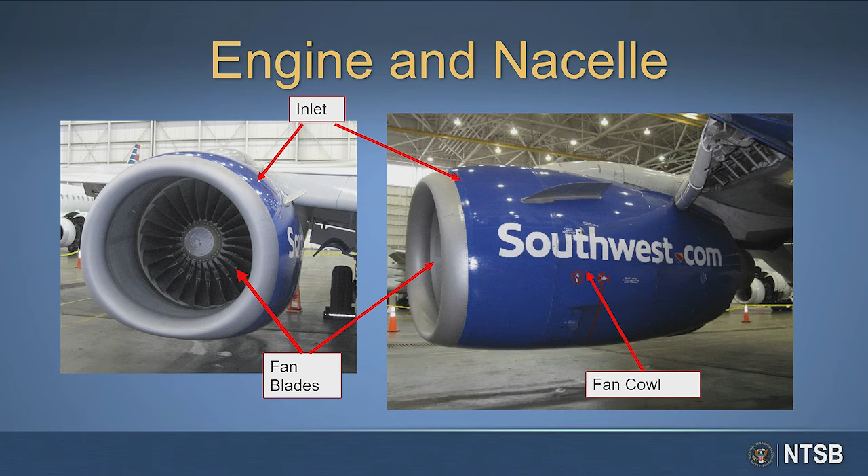Today's hearing will concentrate on the specific events associated with the engine failure and damage to the engine nacelle. The significant components we will discuss today include the fan blades and parts of the structure around the engine called the nacelle, specifically the inlet and the fan cowl.

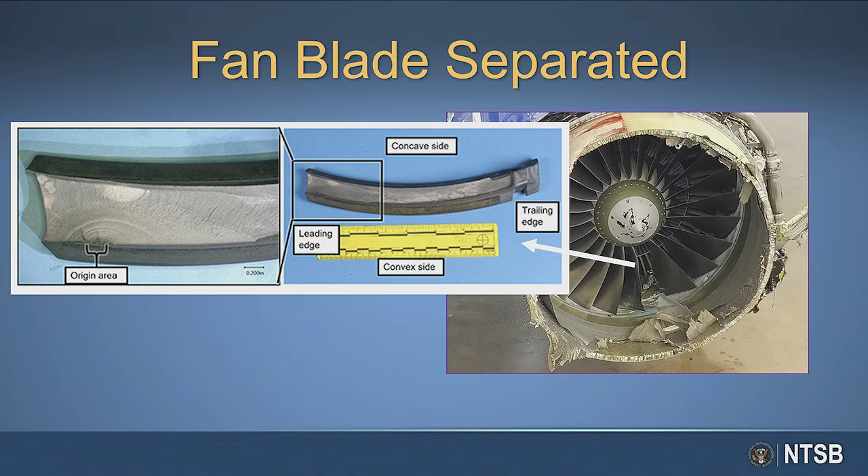The investigation found one of the left engine fan blades separated at the root due to a fatigue crack. At the time of the failure, the blade tip struck the engine fan case, resulting in a large impact load to the engine case and the fragmentation of the blade into several pieces. Portions of the fragmented blade were ejected forward into the inlet. There was significant damage to the inlet and fan cowl that was unexpected for a fan blade out, commonly referred to as an FBO event. We will discuss further details of the damage and the certification history of the engine and nacelle components today.

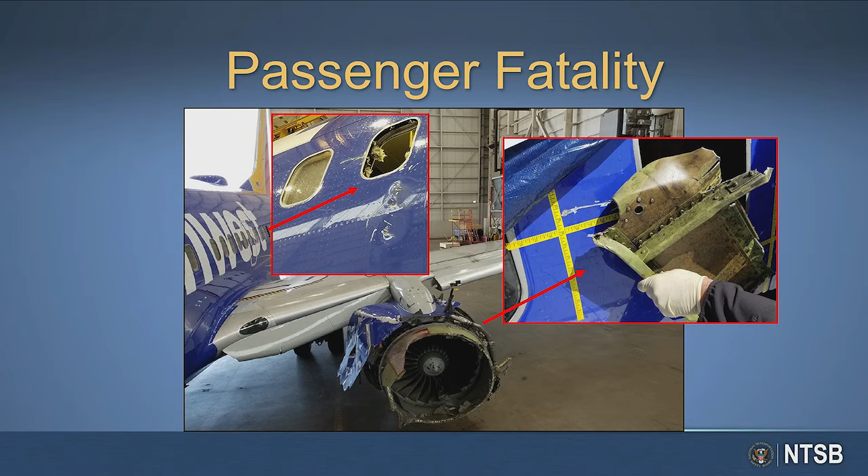A portion of the fan cowl and latch mechanism struck the fuselage near the window adjacent to row 14. The impact resulted in the window departing the airplane, causing rapid depressurization of the cabin and fatal injury to the passenger in seat 14A.

Service bulletins for fan blade inspections were in effect due to a previous CFM56-7B event. However, those were not applicable to this airplane at the time of the Philadelphia event. Airworthiness directives requiring additional inspections were issued following the Southwest 1380 accident. These will be discussed during Panel 1 this morning.

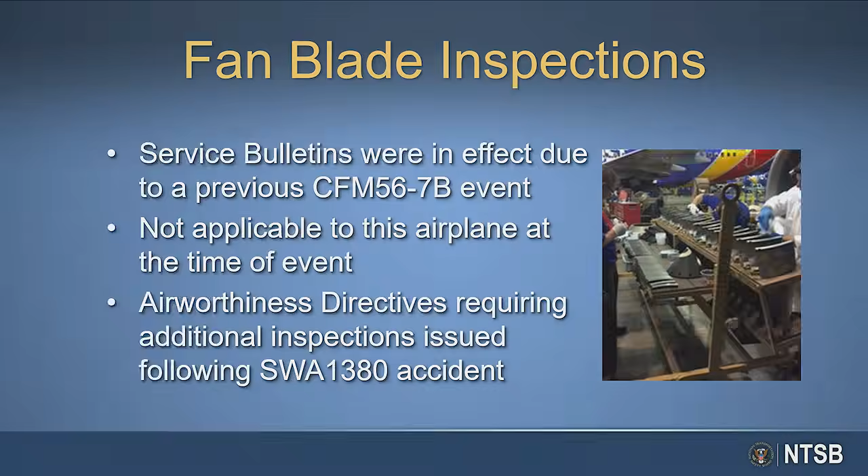Safety issues explored in this hearing will be covered via two panels today. Panel 1 will examine the CFM56-7B engine fan blade design, certification history, the consequences of the fan blade out event, and the inspection intervals and procedures applicable to the fan blades. Panel 2 will examine the Boeing 737 and CFM56-7B inlet and fan cowl design and certification, and the structural capability following a fan blade out event compared to the expected behavior. Exhibits supporting these panels have been entered into the public docket for this investigation, which has been opened at 8 a.m. this morning.

Madam Chairman, would you like for me to now call the first panel of witnesses? Thank you, Mr. English. Please do.

Would panel 1 please take the witness stand? Mr. Seiberg, Mr. Habedank, Mr. Spinney, and Mr. Wibben.

Please remain standing. Please raise your right hand. Do you swear or affirm that the evidence you shall give in the investigation now in hearing shall be the truth, the whole truth, and nothing but the truth? Thank you, gentlemen. Please be seated.

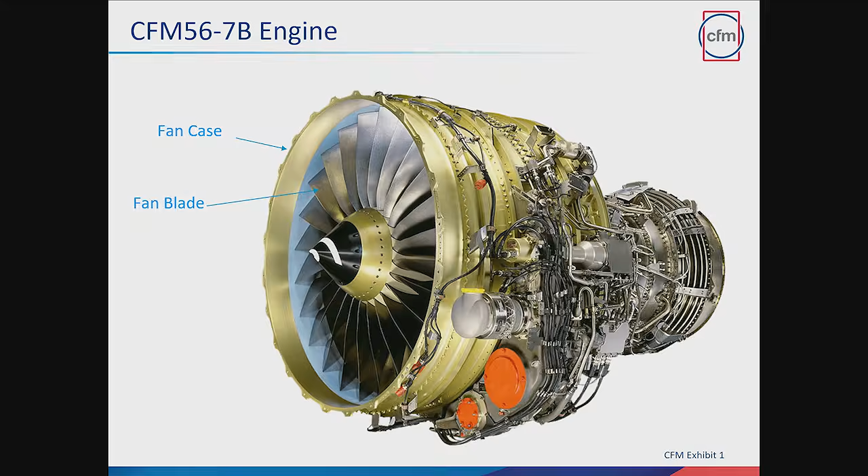Ms. Kemner, if you could go to exhibit slide number 8 now. So this exhibit shows a side-by-side of a narrow chord blade to the wide chord blade. Just to clarify what we mean when we say chord, chord in really simple terms is just the width of the blade. And you can see the difference there between the narrow chord and wide chord.

The big advantage of the wide chord blade is all around thrust and fuel burn. With a bigger blade, wider chord, we're able to pump more air and we're able to pump it more efficiently. And with those two parameters, that's the big advantage. There's also an impact capability with a bigger blade. You're more apt to take impact or maintain a better capability to impact the blade without damage, such as bird strike, hailstone, ice, etc.

And then finally, there's a big maintenance advantage. For the narrow chord blade on the left, there are 38 blades. For the 7B wide chord blade, there are only 24. So a sheer maintainability advantage of roughly 33% fewer blades is significant.

Thank you. Since there are fewer blades and the blades are much heavier, as far as fan blade out containment, are there differences in the approach for design and testing between the narrow chord and the wide chord configuration blades?

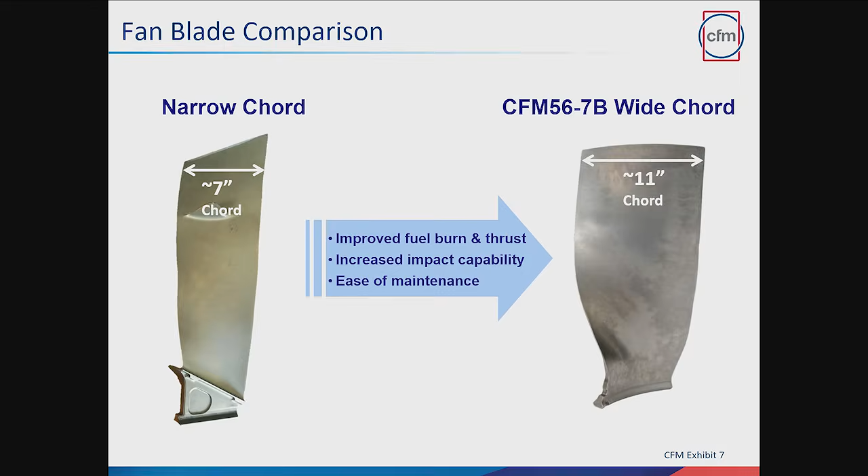I think slides 9 and 10 on that same exhibit help illustrate the point. And again, to frame the reference, I'd ask that Ms. Kemner go to exhibit number 5, which is that cross section we'd shown earlier. One more. There you go. Thank you.

So just to explain what we mean, we keep talking about containment, radial containment. Per the regulation that Mr. Spinney discussed, the requirement is to release one blade at the root or attachment point to the disc. So down at the base of that blade where that magenta color is, is where you would be releasing it. The requirement is, as that blade is released and impacts the fan case and breaks into pieces, none of those pieces can penetrate that fan case. That's what we mean by radial containment.

The other criteria is that due to the vibration of a lost blade, you cannot fail the mounts with those unbalanced loads. The engine cannot catch fire, and the engine configuration has to maintain its ability to safely shut down the engine. So those are the requirements, that puts in perspective what we're trying to do. A lot of focus, though, on the radial containment capability in the fan case.

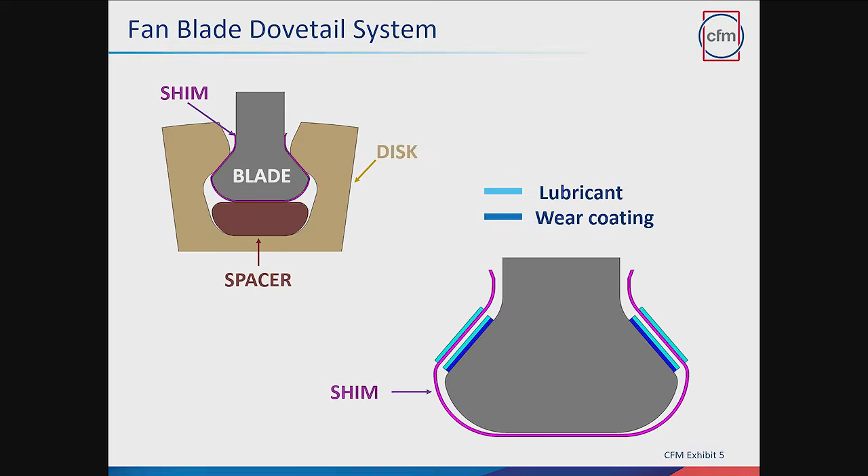So now, if you will, Ms. Kemner, go to exhibit number 9 in the CFM package. Okay, so this chart really explains the collaborative process that is executed through collaboration with the agencies, the airframer, and CFM. It is extremely complex. Put in perspective, there's hundreds of people working on this at any given time across the different companies.

So we kind of broke it into a couple big blocks. On the top, there's the development process. That's where we're developing the design. It's not certification activity, it's all about developing, building confidence, maturing technology, so that when you get to the certification test, you're ready. The expectation is that you pass.

So during this development process, any engine really starts with the key inputs. From the airframer, we get key information, in particular fuel burn, weight of the engine, details on installation, et cetera. We have the Part 33 requirements from the agencies, and then we have our own internal design practices, requirements, et cetera. From all of that collective data, we establish a preliminary engine design.

Once we have that design, we enter this development process where we go into detailed design and analysis to refine the preliminary design. At that point, we would run our first rig test, and I'll talk about what a rig test is here in a second.

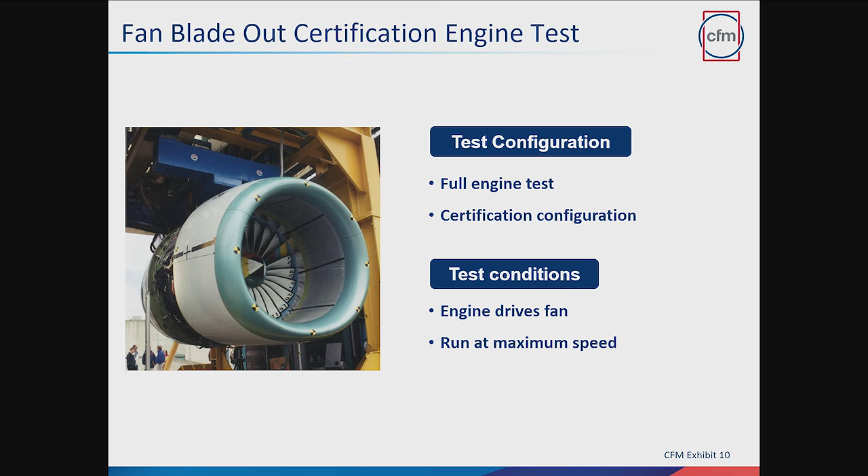So if you could, Ms. Kemner, go back to the process slide on number 8. So again, all that processing there in a development phase was very collaborative with the airframer. There were dozens of meetings. We started those meetings in 1993, so several years before certification, and a lot of data exchange so that both Boeing and CFM were developing their hardware in parallel with the information exchange provided.

So as I said, out of all that rig testing, we established the certification testing. Then we enter the certification process phase. And before we go to test, there's, again, lots of collaboration. On the airframer side, the goal is to get the information, data, loads, high-speed imaging so that they could witness the event after the test. There's a list of requests from the airframer. We get agreement on what that is, and then we define what the configuration is and how exactly we're going to run the test - what speed, how are we going to release the blade, et cetera. All that detail gets put into a formal certification report, and that report is passed to Mr. Spinney and his team at the FAA, and we get a formal approval of that before we can run the test. When we actually execute the test, there is an agency member there to witness it, but there's really nothing to see in the test itself.

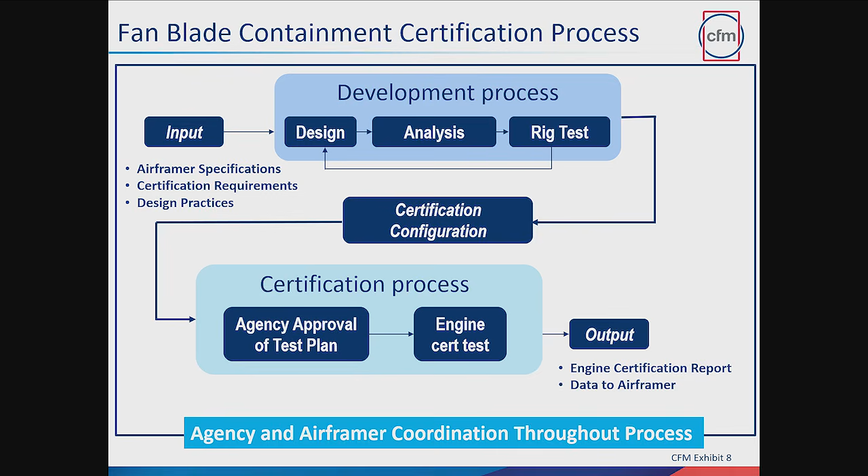This question is for Mr. Seiberg. Before we get into any of the rig test results or certification results, I think this would be a good time to discuss the various parts of the engine fan inlet and fan cowl and how they interface with the engine and airplane. Please discuss who has design and build responsibilities for both the inlet and fan cowl. Exhibit 7 Bravo, pages 2 through 4, explain that. It's a good overview.

The inlet structure, as indicated here, figures 1 and 2 show the inlet on the front end of a Southwest airplane on the engine. Figure 3 points to the constituent parts of the inlet: the outer barrel, the inner barrel denoted in green, and the front end, which we refer to as the lip skin. Figure 4 removes the outer barrel to show visibility to a containment doubler in yellow on the back side of the inner barrel, as well as the aft bulkhead.

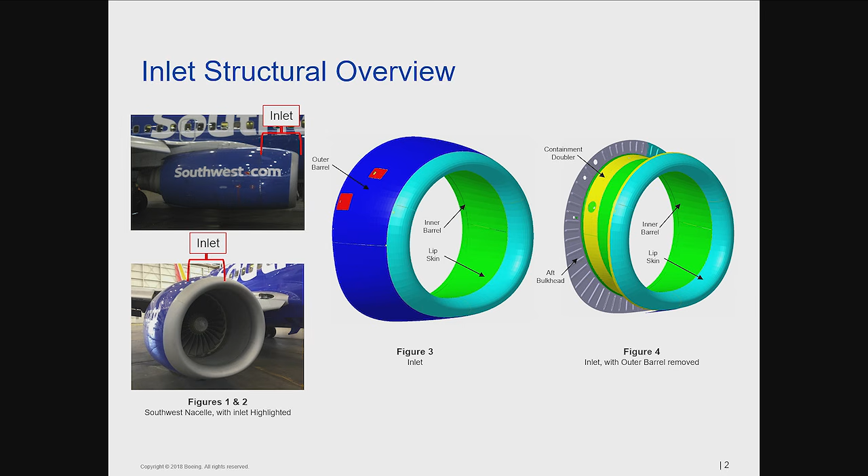The figure on the right is a cross-section cut. In the lower left-hand corner, figure 2 shows the front end of the engine and the upstanding vertical flanges where the engine and the inlet interface, referred to as the A flange. There's a series of bolts around the circumference that directly attach the inlet to the front end of the engine. The constituent materials of the inlet are primarily aluminum, where the forward and aft bulkheads are made out of titanium. The primary purpose of the inlet is to direct smooth, uninterrupted aerodynamic flow into the engine, as well as direct smooth aerodynamic flow external to the nacelle.

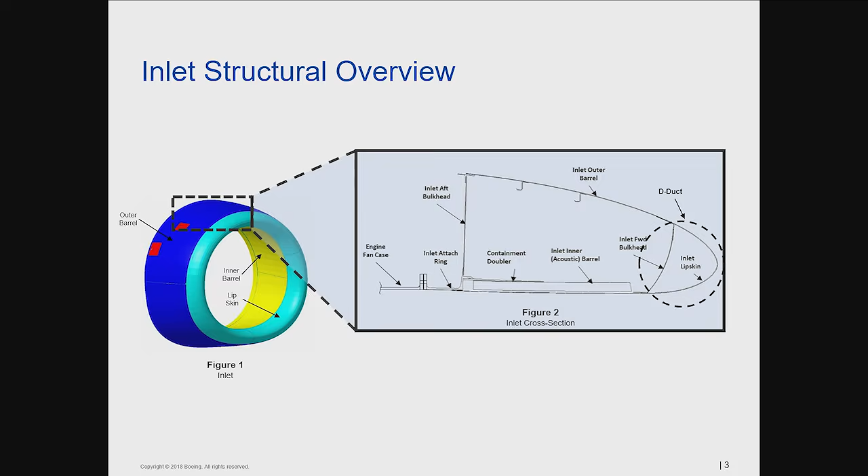This illustrates the fan cowl. In the picture on the left, the fan cowl is shown in the center of the nacelle installation. Relative to the engine, it wraps around the forward, front half of the engine around the fan case described earlier. The primary purposes of the fan cowl are to direct smooth aerodynamic flow around the nacelle, but also to provide maintenance access to the engine by means of hinges at the top and latches at the bottom. Unlatching the cowls at the bottom and holding the hinged open cowls provides maintenance access. The primary materials for the fan cowl are aluminum throughout the skin and stiffeners around the circumference, and the hinges and latches are a combination of titanium and stainless steel.

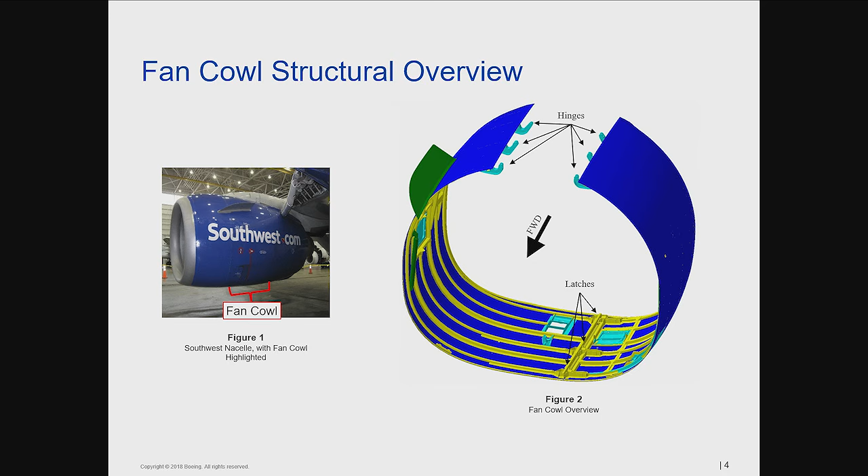These parts, the inlet and the fan cowl, have design requirements that are developed by Boeing, and those were deployed to UTAS, who had the responsibility to take those requirements and develop, design, and build the hardware that complied with them. Great, thank you.

This question is for Mr. Seiberg. As Mr. Habedank had mentioned before, there were numerous rig tests done prior to the actual FBO certification test. One of particular interest is rig test 4, which, if my memory serves correct, is one in which a representative inlet from Boeing was installed. My question is: is it customary for Boeing or any airframer to install airframe hardware on a rig test? And can you discuss some of the results from that rig test and whether there were any corrective actions based on those results? Also, what's the purpose of installing any of your hardware on an engine rig?

Based on best practices that Boeing had developed over working with several engine manufacturers, the interaction between an inlet and a fan case during a fan blade out event is a highly dynamic transient event where there's a lot of loads transmitted across the interface of the A-flange. We had the opportunity to work directly with CFM to support rig test 4 with what we believed at that time to be a production representative inlet, providing the right mass and stiffness on their end, but also allowing Boeing to understand and characterize what happens with the interaction between the inlet and fan case following a fan blade out event. Given this was in a vacuum, this was really just to assess that impact phase where the blade hits the case and then there's a transmission of load, or a ripple effect, across that A1 flange.

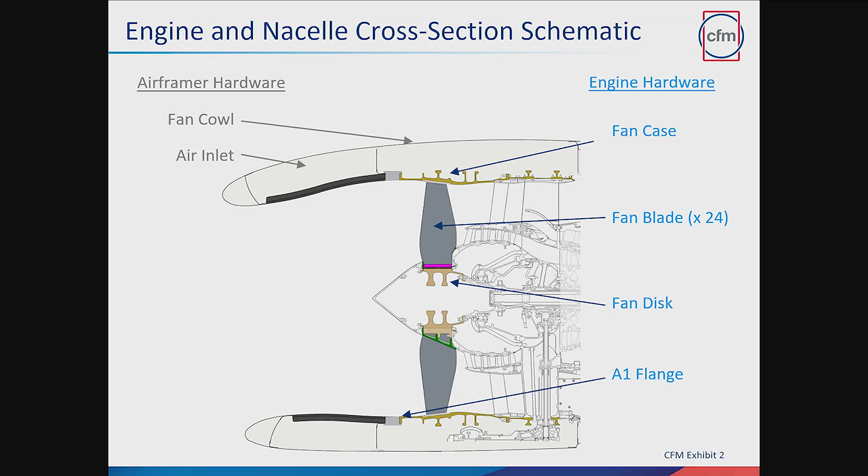Can you please go over in general terms the results of the fan blade out certification test, both the engine damage and the inlet damage as far as you're aware? Mr. Scarfo, could you clarify which certification test this is talking about? The fan blade out certification test, the very first one. Yes, okay.

There was radial containment - the fan case did its job, it maintained the blade radially. We demonstrated the radial containment capability. Shortly after that was demonstrated, there was another event that happened during the test which drove us to a design change on the axial retention feature of the blade. So you asked about damage to the inlet - because there were 5 blades that failed axial retention, those all came forward and did damage the inlet.

So based on this testing, what were the corrective actions or redesigns that CFM initiated to address the release of those additional blades? We did analysis based on the results of the test, and then we also ran several additional rigs to try to validate a new design. That design was included on the second certification test, to demonstrate that feature and validate that it did not fail.

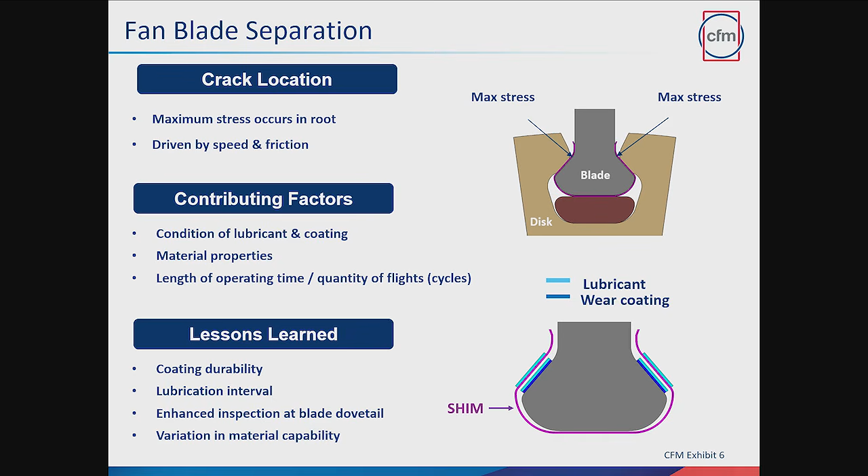You're talking about Philadelphia, correct? Not Pensacola? Yeah, I apologize, yes. That's okay. I just wanted to clarify that those corrective actions happened after Philly. So what I'd like to focus on is those action items. Pensacola was the first fan blade, correct me if I'm wrong, that had a separation or even a crack detected. Then there was a set of corrective actions CFM had taken, and then Philadelphia happened, and as we got a little more smart about the problem, another set of corrective actions happened as well. Yeah, so I kind of just want to go over those various corrective actions. Yeah, okay, thanks for the clarification.

So after the Pensacola event, up to that point, the CFM56-7B had been operating for over 20 years and nearly 300 million flight hours with no fan blade out events. So this was certainly an anomaly. The team responded very quickly. We put all resources on the issue between GE and Safran. We worked an investigation that was broken up into three elements.

The first of the elements is around investigation and discovery, looking at the metallography, et cetera. Then moving into development of the inspections we talked about, and finally the implementation of those inspections. We may get into those details, but because of time I'm not going to go through those right now, with a focus on the service bulletins. So all of that work was being done following the Pensacola event.

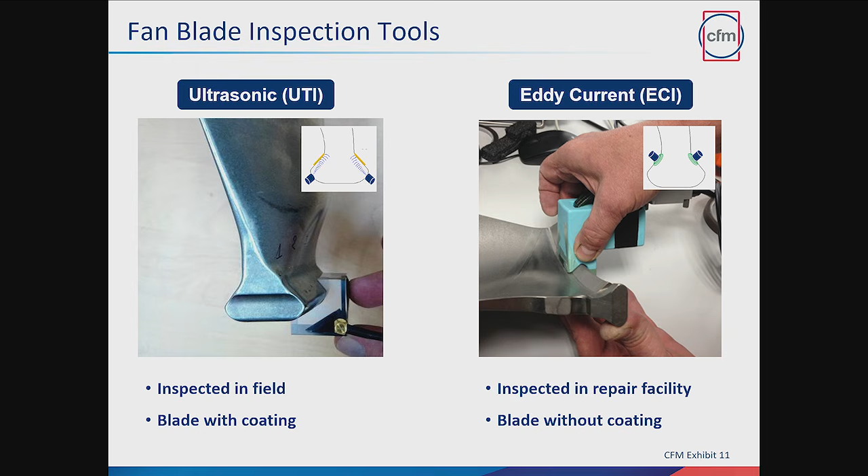Thank you. I've got one more question. I didn't want to have Mr. Wyben feel left out. I've got one question for you.

Why were the fan blades on the Philadelphia event not inspected at the time of the event?

As Mr. English indicated at the beginning of the hearing today, the fan blades in the event engine in Philadelphia were not subject to either the service bulletins that CFM had issued prior to the event, subsequent to Pensacola, nor were they in the population of high-time fan blades that Mr. Habedank alluded to that we inspected in the months after the Pensacola event. So we really had no basis to prioritize these fan blades versus any other blades in our fleet.

In December of 2017, we made the decision to incorporate the ultrasonic inspection procedure into our regular maintenance program and look at every blade in our fleet every 3,000 cycles. In the time period between December of 2017 and the event in April of 2018, this engine was not inspected. It did not have the blade lube come due.

Thank you. Mr. Billings? All right, thanks, Pierre. Does the tech panel have any other questions to go around? Dr. Fox, do you have any follow-up? I think we're out of time. If you have something, we can get something in. Okay, I guess I'll just ask one quick question for Mr. Habedank.

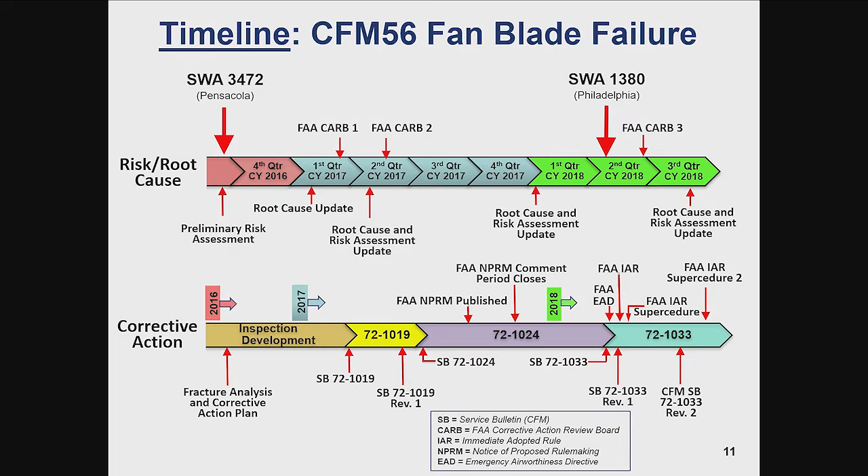We have another tool called an immediate adopted rule, where it's not quite as high as an emergency AD, but it becomes effective shortly after we issue it, and we seek public comments after the effective date of the AD.

In the final, lower risk categories, while they're above the threshold, we've determined an unsafe condition, but the timeline in order to correct that unsafe condition is longer. Then we issue what's called a notice of proposed rulemaking, and follow that by seeking public comment on the rule, then publish a final rule after we evaluate the comments received from the public.

And the fourth, obviously, if we determine that there's no unsafe condition, then we would take no airworthiness directive action.

And so at the time after Pensacola, was Pensacola the very first fan blade out of this particular blade? That's correct. Our initial assessment for Pensacola was the first fan blade out in 300 million flight hours of the engine. It was a very unexpected event, and the consequences were a slow depressurization. So we determined early that we would require some corrective action and that it was an unsafe condition. But we also determined that we had some time, and we were taking the route of a notice of proposed rulemaking.

Okay, thank you. And just one final question. That rig test 4 that you described, was that specifically to demonstrate the retention of the blade after that first test, which showed a blade out?

Well, I might be confusing the different rigs in certification, but let me try to clarify. On rig test 4, as described, we liberated the tip like we always do, and that piece penetrated the inlet. We had the Boeing inlet on that test.

Then we ran engine 2 build 2, which was our first certification test. In that test, we demonstrated the radial containment capability, but then shortly after the event, seconds later, we had 5 blades released. That's what caused the damage.

When we went back for the second certification test, the purpose of that test was to demonstrate two things: one, that the design change was adequate, that we didn't release the blades again, and two, that the containment capability demonstration was not affected. So we still had to demonstrate the radial containment capability.

So it wasn't meant to demonstrate the inlet and fan cowl damage? There was no specific reason to have put an inlet on the second certification test. Okay, thank you, that's all I have.

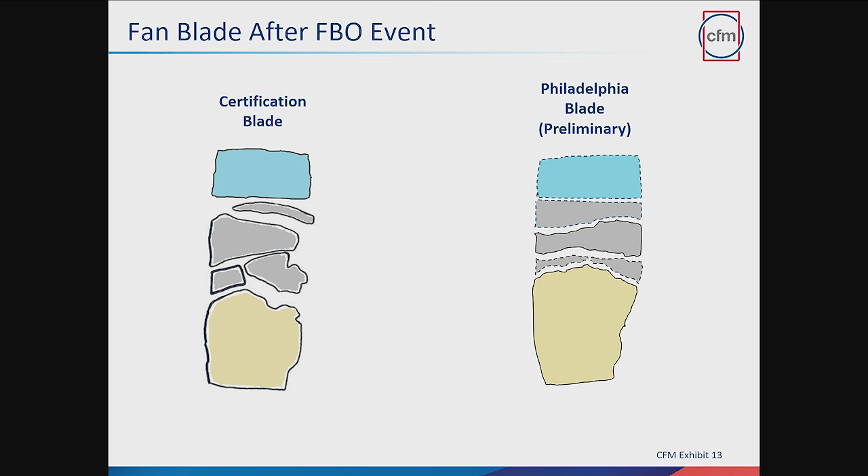This is for Mr. Seiberg. This is in relationship to rig test 4. I think we kind of glossed over it a little bit, the importance of rig test 4 from the inlet's perspective. That was the first, and if I recall, the only time that a production-representative inlet was installed on a rig prior to the certification test. Based on the damage that you saw, what were the corrective actions or redesigns that Boeing undertook to address the damage that was observed in rig test 4?

Following rig test 4, we worked directly with CFM to fully understand the fan blade fragment definition that went through the inner and outer barrel of the inlet. Upon definition from CFM of the exact parameters of energies and trajectories, Boeing then put a conservative estimate on that to develop a requirement, which was then deployed to UTAS, who was responsible for the design and development of the inlet, with instructions in those requirements to develop a containment doubler to be able to contain the fragment as defined from rig test 4, with a conservative level estimate above that.

So just for clarification, rig test 4 had a representative inlet without a doubler or containment shield, and for the certification test, that's when you had a representative production inlet with a containment shield. That is correct, and then through the post-test investigation of the data from the certification test, we were able to follow the fragmentation going into the inlet and get observations that the containment doubler was not penetrated during the certification test. Excellent, thank you. That's all I have.

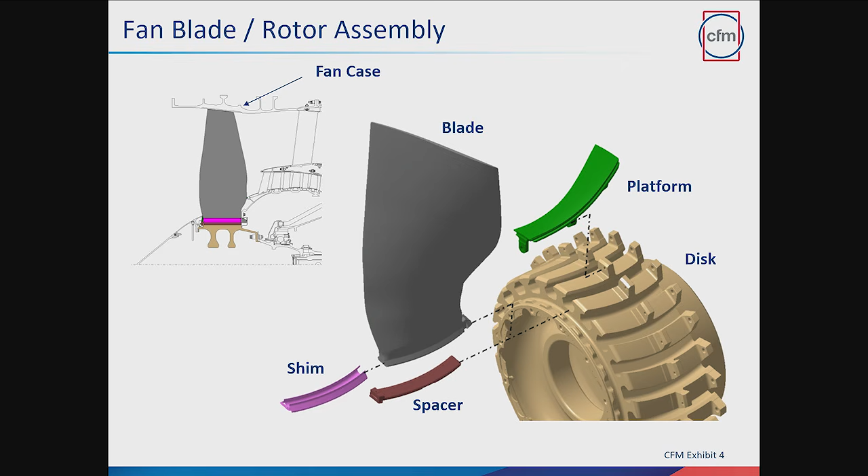That feature's in there so that with normal operation, you've got a heavy aero load with all that air pumping. Without some kind of axial feature, it would just shove the blades forward. Okay, great, thank you, sir.

If we can go back to the other photos, let's just talk through Philadelphia a bit. So we know for Philadelphia, just the one blade failed at the root. The axial retention was not an issue.

That we see from the Philadelphia event. Are you directing that to me? Yes, to Mr. Habedank. Okay, so I want to make sure I understand exactly what you're looking for. Just describe what we're seeing here with these fragments.

So these are similar to what we think we see in the Philadelphia event, and you mentioned earlier that you think that's similar to what you saw in certification, correct? Yes. With this in-process work being done, let's focus on the tip panel because that's very consistent—it's the highest energy piece.

It doesn't just come straight out forward because it's got rotational energy. It's sliding almost like a marble around the inside of the nacelle itself. As it's doing that, it's also coming forward. So there's a helix angle associated with the trajectory, which is where a lot of the focus of the investigation is. These are the witness marks on the case that define what that spiral or helix angle is for each of the particles.

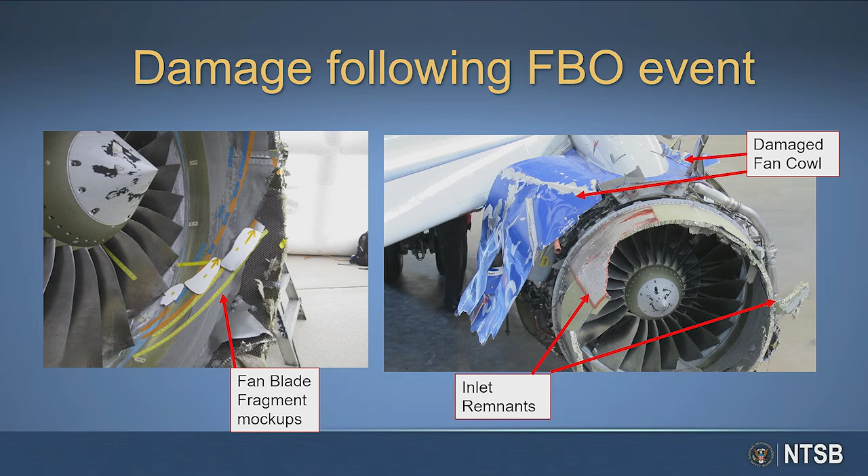And just to go back a little bit, the trajectories that are in the installation manual are based on the final certification test in the prior certification test. So they all came after the rig test that you were talking about. After that Cert 2/2, correct? Yes. Right. Okay, thank you.

That's the end of my questions. Matt, Dr. Fox has some questions.

Thank you. I guess, Mr. Habedank, you had mentioned earlier during prior line of questioning about not taking credit for the shot peen surface condition, and also reference standard material properties. Could you describe a little bit how you determine the standard material properties with regard to fatigue life?

Yes, for the original design, for the original life of the initial design, we used standard titanium material properties for the blade and made assessments with that. Part of our root cause investigation, we wanted to get a better material curve, so we actually took multiple blades and took specimens out of specifically forged blade forgings for 7B blades, and re-looked at the material properties to get a better definition.

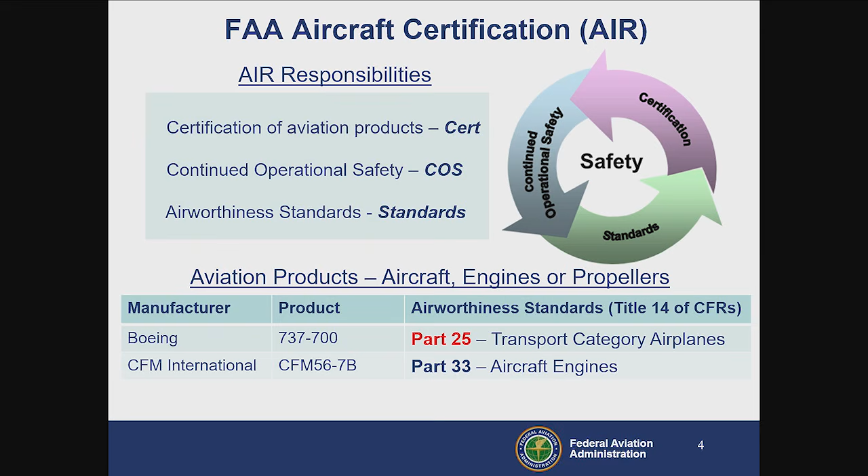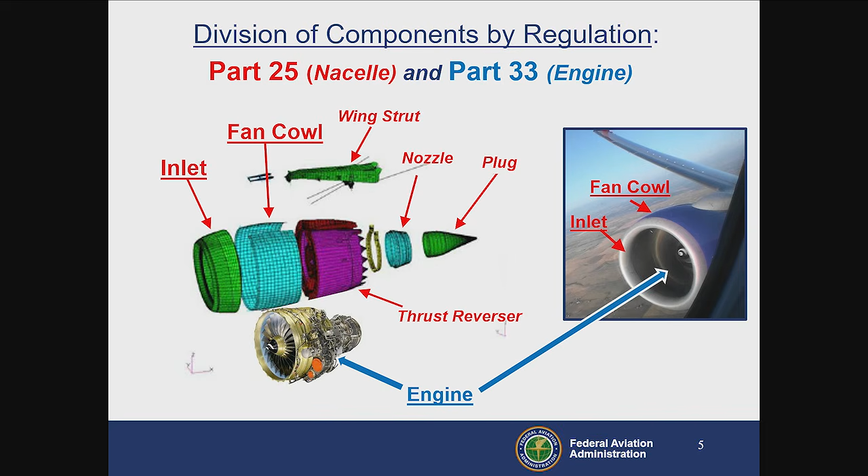If we move to Slide 5, please. The Part 33 engine standards apply to the engine. The Part 25 standards apply to the engine installation, including the items highlighted here in red, the inlet, the fan cowl, the strut, nozzle, and plug and thrust reverser. All right, great. Thank you, Mr. Wickland. Could you please let us know what the acceptable means of compliance for the design and certification of the inlet and the fan cowl are?

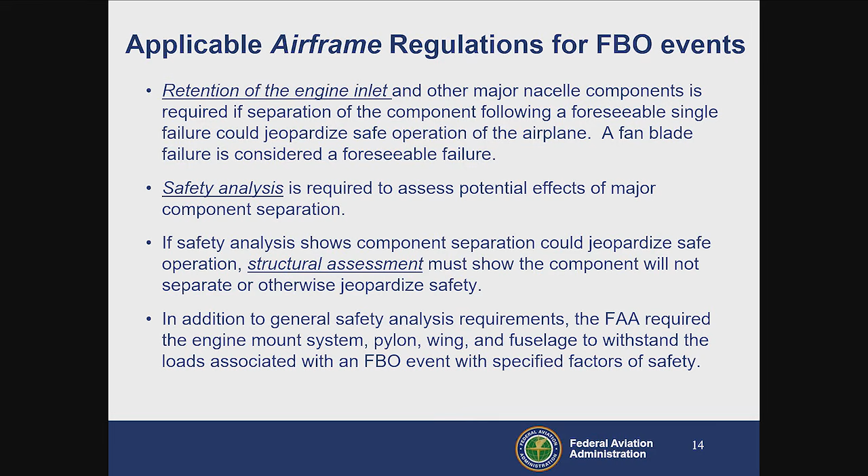Certainly. If we refer to Slide 14, please, of Exhibit 7D. Basically the requirements for the engine inlet and the other major nacelle components is for the airplane manufacturer to show that they are safe in the event of a fan blade out event. In this case, the airplane manufacturer would show that a fan blade out event would be a foreseeable single failure, and that the result couldn't jeopardize the safe operation of the airplane. In the case of the engine inlet being the mass that it is, generally that requires that they retain the inlet in a fan blade out event.

Back to when I was getting at with the acceptable means of compliance, more straightforward, is it required that the inlet or the fan cowl actually go through a structural test as an assembly, as an entire unit, or can it be certified through analysis alone? It could, either way would be fine. You could either test it or conduct analysis based on test.

Great, thank you. This would be to follow up from a question from this morning that was already addressed, but I'll have this in two parts, and Mr. Wicklund or Mr. Seiberg, or either one of you could answer it. One will answer the other. Is there a requirement then for a production inlet during the certification tests? And then what would follow with that question is, let's just go with that for right now then, thank you.

Oh, so there is not a requirement for production inlet. As was discussed earlier, they could use representative components to simulate the mass stiffness of the inlet during a Part 33 test. I was asking just then, so for clarification, because we talked about rig tests and we talked about actual certification tests. So even for those engine Part 33 certification tests, it is not required by the FAA, or well we're not going to speak for DGAC here, EASA, but by the FAA then to have production hardware for the inlet on their test. That is correct.

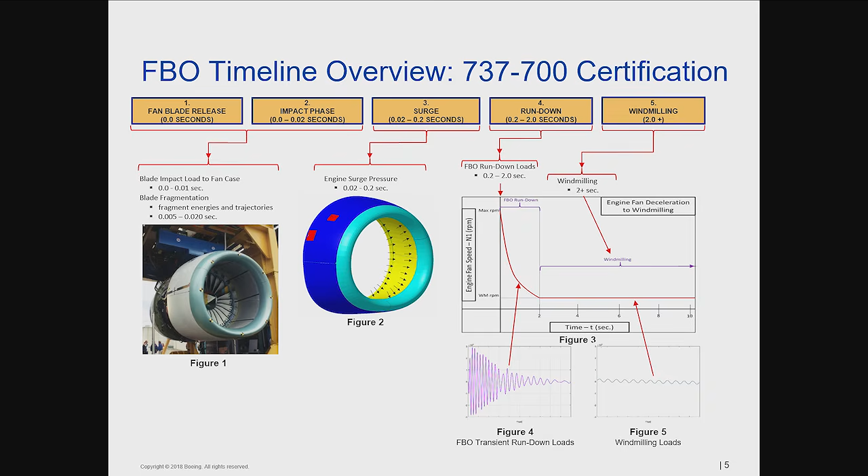Thank you. During our investigation, we referred to that ripple effect that you just spoke of as the displacement wave.

If we go back to the rig tests or the certification tests, did that displacement wave cause damage to the inlet or inlet structure? Through the tests we supported, at that time frame our analytical capabilities of understanding the displacement wave were not understood from the analysis side. That's one of the primary reasons we put inlets on both rig tests and certification tests, even though they're not required, to understand those first few milliseconds and how the interaction between the engine and the inlet affects it. From the tests we supported, there was damage to the area around the aft bulkhead as a result of that ripple effect or displacement wave.

And that damage was the same as you've seen in Pensacola and Philadelphia? In those areas, yes, correct. So it was a direct correlation between what was happening in test and what happened in the events. That is correct. Okay, thank you.

You gave these timelines up here on top. Could you give us an estimate of how long it was for our event from the fan blade out to cabin depressurization? The NTSB, we've supported their timeline estimate with the review of the flight data recorder information, and it's the NTSB's estimate as well as Boeing's that the fan cowl fragment that hit the airplane hit it within 3 seconds from blade release. So within 3 seconds, we're out to the rundown phase then, that far out in the timeline that was up earlier. Just about, yes.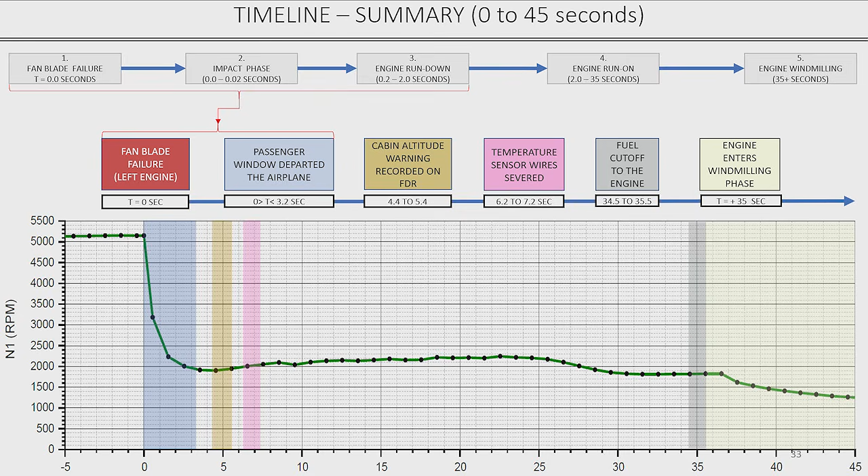All right, so that's during the run-on. We talked about this at length in the morning, but Mr. Manabe, could you compare and contrast? I understand there were more damages than just the doubler, and there was more to the redesign when we went from the initial inlet in the rig test to the 2-2 test. Could you go through all the changes that were made as a result of the test?

Sure. Let me utilize the UTAS exhibit. If we can move to slide number 4, please. UTAS, yes, 7C.

So let me walk through the evolution of the inlet. There were two different production configuration inlets that were used between the Rig 4 test as well as the engine cert 2-2 test. This depicts the initial inlet design. This particular configuration did not include a containment doubler. The original requirements that we had received through the SCD from Boeing didn't have any blade fragment containment requirements, so we developed this without the containment doubler shown here.

As was discussed this morning, originally it was believed that the containment of the blades would be handled by the engine fan case. That's what's shown here, on the lower right, with that 15 degrees. As a result of the fan blade out test during the Rig 4, we saw that fragments were moving forward into the inlet. At that time, it was determined that additional containment provisions would be required within the inlet. At that time, then, the SCD was updated by Boeing.

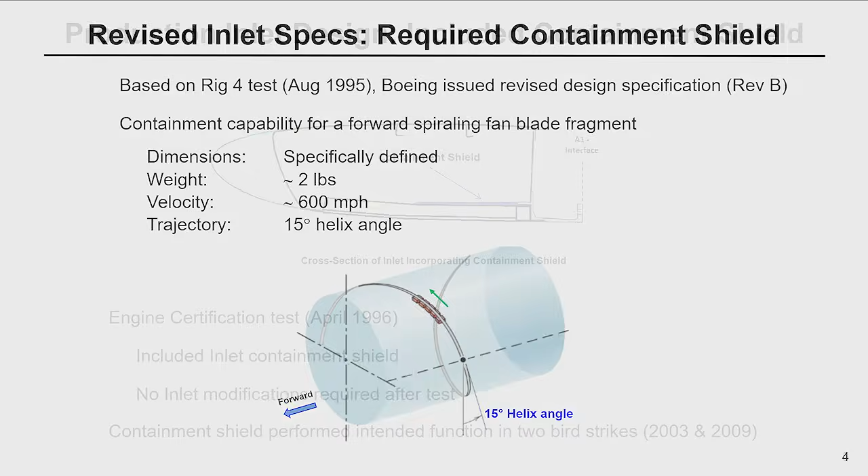So this is the second configuration of the inlet. This is the one that includes the containment shield shown here in blue. And this is the version that we went into the certification 2-2 test with. During that test, it was determined that the containment shield as well as the inlet performed its intended function, and that at that point in time, there was no further redesign required.

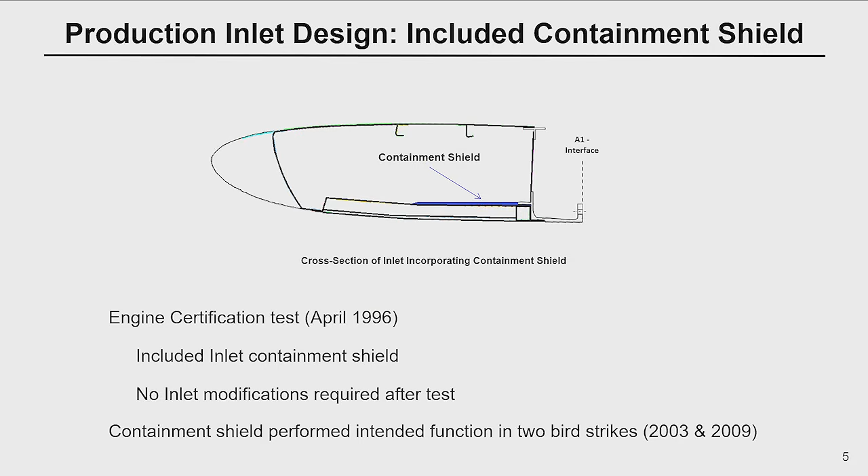Mr. Manabe, if we go back to the first slide. One more. Yeah, this one here. There was more damage, I believe, as a result of one of the tests that led to the other redesigns that are shown here in the attach flange and at the honeycomb interface and the inner barrel?

Yeah, so let me explain. So this is the initial configuration that was used during the Rig 4 test. There was a blade fragment that came forward, and it damaged the inner barrel and then also damaged the outer barrel. There was some additional damage in the inner barrel right around where it says the attach ring, the aft bulkhead interface. There was some additional damage in the inner barrel at that location.

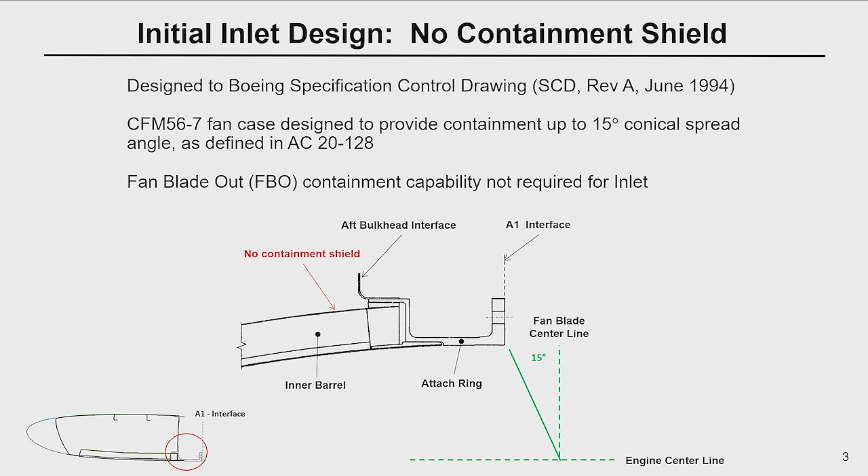If we move over to slide number 6, please. This actually gives a good contrast with the two different configurations. So on the left is the initial design. On the right is the final production configuration. During the Rig 4 test with the initial design, on the aft bulkhead interface, we saw some damage there on the inner barrel. We then extended the length of the attach ring forward so it would cover that portion of the inner barrel. So that was taken out of the picture for the next configuration.

Then we also added the containment shield, and then we added the length to the attach ring.

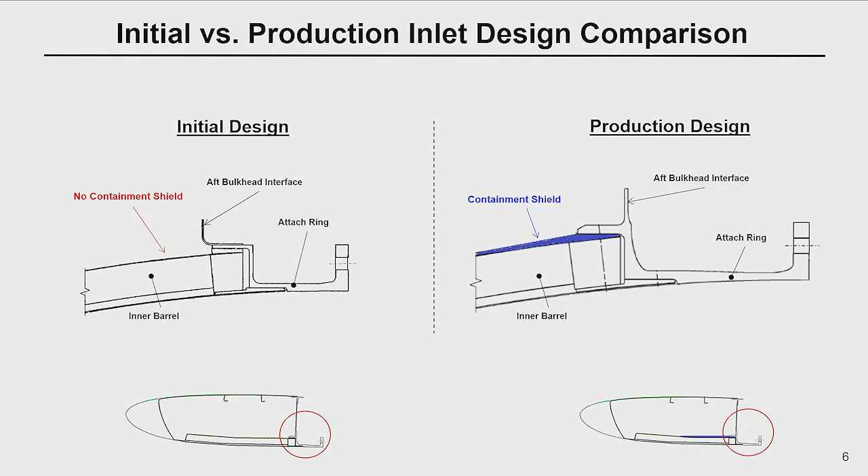Great, thank you. I've now gotten into the point where we have the overlap with the Boeing company and UTAS. So whether Mr. Manabe or Mr. Seiberg would like, could you take us through, much like this morning, just briefly the relationship between the two of you and the manufacturing, design, and analysis of the inlet and fan cowl?

Yes, Ms. Kemner, could you please bring up slide 6 from the Exhibit 7B?

This provides a high-level outline of how the tri-party collaboration took place over the preliminary design, detailed design, and certification. Within the airplane program, the airframer stipulates the requirements for the engine, usually in terms of thrust and fuel burn. For the inlet, it's usually in terms of loads and aerodynamic configuration. Once the parties have their sets of requirements, Boeing typically collaborates with all the parties to make sure they understand what the requirements are, how they will comply with those requirements, then work through the actual demonstration of developing the parts that will comply, and finally supporting the validation and ensuring all requirements are complied with.

Regarding a fan blade out event, the preliminary information that comes from CFM is what we refer to as the forcing function - the internal engine loads that are developed in those first 2 seconds. That helps Boeing derive loads for the entire propulsion structure, including the wing attachments, where we include things in our model that aren't in the ground test, which are the air loads. We also look at different release angles that are not done in the test. From there, we get a preliminary design.

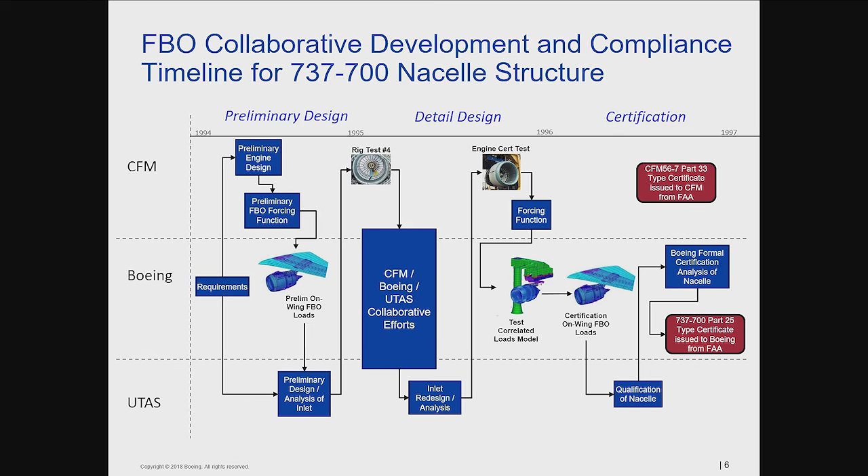Mr. Syberg, we spoke earlier about the different phases of loading throughout the fan blade out event.

Understanding that everything is still preliminary at this point with everything we're working on, how has the analysis progressed in both Philadelphia and Pensacola to date, and where are you with the analysis?

So the analysis, which has been going on now for a lot of time with a lot of resources, and focusing on the timeline we discussed earlier, where it showed that the parts departed the airplane within 3 seconds, that brings into light that the impact phase and the rundown phase are the primary areas we need to look at.

Within the impact phase, we have evidence of scrape marks within the fan case of fan blade fragments exiting the engine. But on the inlet side, we were only able to recover portions of the inlet that remained after landing. So there's a lot of detailed metallurgical work going on the fracture surfaces of that hardware that's been obtained. There's also detailed visual examinations of the hardware to understand where all the failure locations are.

In addition to that, we have the timeline that we're working with. So where the point of the investigation is now is we're doing detailed analytical simulations using our latest model capabilities to try to be able to predict the same failure modes and locations that the observations have shown us, and that those failures occur within the timeline that we've estimated with the investigation.

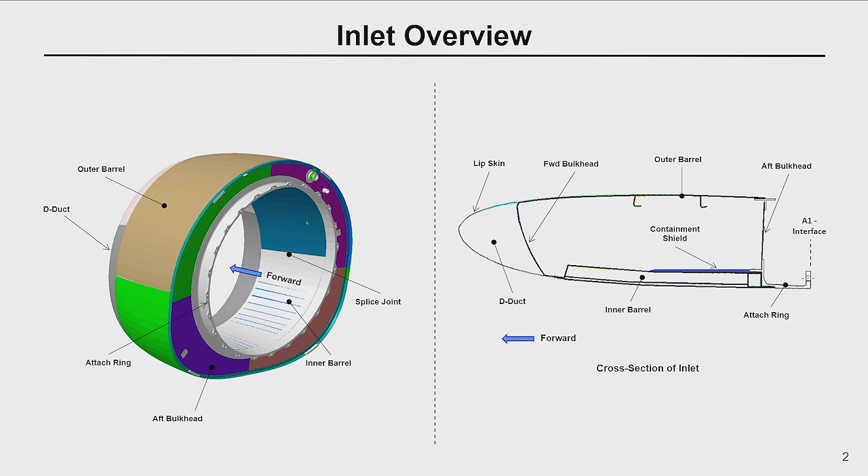That fragment, the 2-pound segment, was the tip fragment that went through and was documented in the regulatory certification documents. We put the weight, trajectory, energy, and direction, which was the 15-degree helix angle, as Mr. Spinney described this morning in the installation manual.

Great, thank you. Mr. Habedank, again coming back to this morning, we were talking about blade fragments, and I believe we have 10 tests. What are we, 8 or 10? I'm trying to remember - 8 rig and 2 cert? Yes, total of 8 rig tests and 2 certification tests.

Amongst all of those tests in their entirety, were the trajectories, masses, velocities, directional movement, and behavior the same amongst all 10? It was similar. The tip fragment was probably the most consistent piece, broke off in a similar manner, and always went forward in all 10 tests. So that was probably the most consistent piece. The midspan fragments, as we've talked about a couple times today, sometimes go forward, sometimes aft.

Torben, I, and others have said there were multiple collaboration meetings between CFM and the agencies and the airframer as we were going through the rig testing, and primarily right before certification we reviewed all of the results collectively, and the midspan fragments were a topic of discussion.

Great, thank you. Mr. Manabe, you have all the hardware for both Pensacola and Philadelphia located at your facility. Can you compare and contrast the similarities and differences between those two inlets and fan cowl structures?

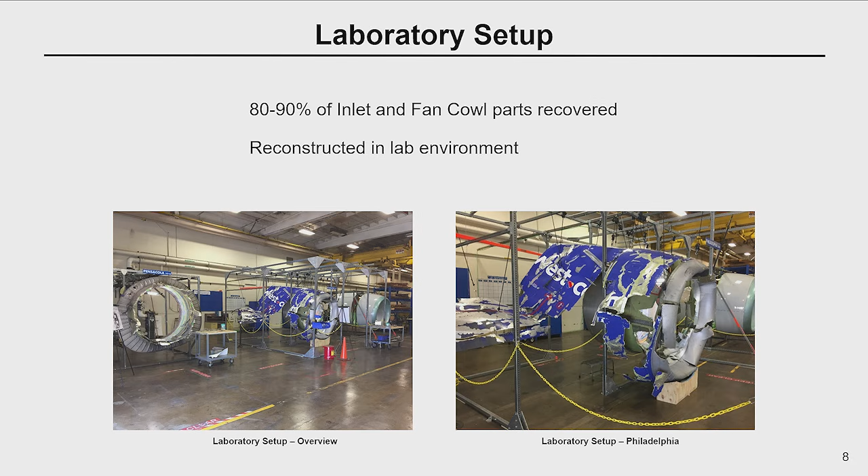This gives a little bit of comparison between the Pensacola and the Philadelphia event. On the left is the Pensacola event, the right is the Philadelphia event. The fan cowls in the Pensacola event did stay attached, as we had talked about. We believe one of the reasons for that was that the aft bulkhead on the inlet, as you can see in the upper left - the silver bulkhead - stayed in place. The fan cowl, which is the blue portion there in the upper left, stayed tightly wrapped around that aft bulkhead. So we believe that might have been a contributing factor to why the fan cowl stayed attached in Pensacola and not on Philadelphia.

If you move to the picture on the right, that's the Philadelphia unit. We did see the departure of major portions of the inlet as well as the aft bulkhead. We believe that may have contributed to some of the scooping underneath the fan cowl.

What you'll also notice in the two pictures above, in the dark greenish color, that's the containment shield. In both events, the inlet departed - portions of the inlet departed just forward of that containment shield. So that green cylinder that you see in both pictures represents the containment shield. In both cases, the inner barrel of the inlet departed at that location.

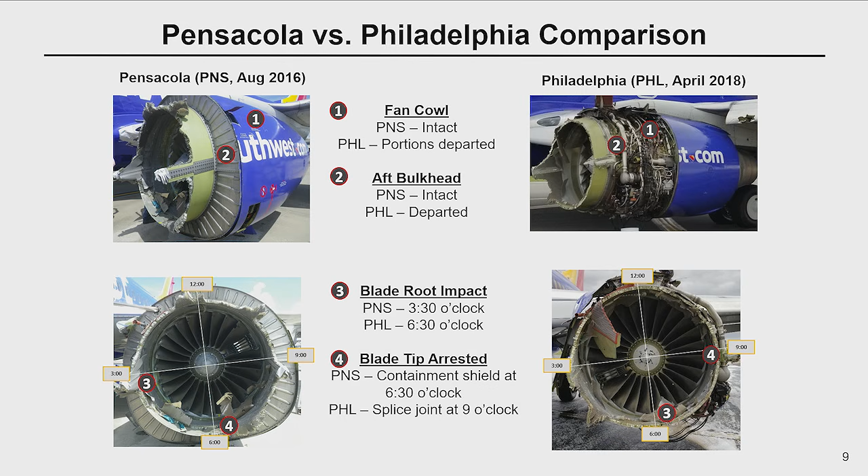Great, thank you gentlemen. For right now that's all I have, and I may follow up if we have time. Thanks Brian, we'll go around the panel. Mr. Scarfield?

I'd like to get a little clarification on the sizing of the containment shield. It's my impression that the sizing is based on the fragments sliding across the shield and dissipating its energy. Was there anything looked at as far as if blades don't actually perform that sliding action, but actually fly? And if not, is that going to be part of the future analysis for determining whether the containment shield is correctly sized?

Is that question for, who's that question for? Either or. Okay.

So at this point, the containment doubler was sized for what we saw on rig 4, which was a penetration through the inner barrel and through the outer barrel. The requirement as it was depicted was originally received from CFM as 1.8 pounds at a certain speed and certain trajectory. Boeing increased the size of the fragment to try to account for not just the tip, but maybe some ancillary damage from the mids as well. Going through the investigation here, Boeing's looking at a full range of potential fragment trajectories and their potential impacts on the inlet. Now whether you're sliding along the doubler or trying to penetrate through, those are all trajectory angles that are being assessed now.